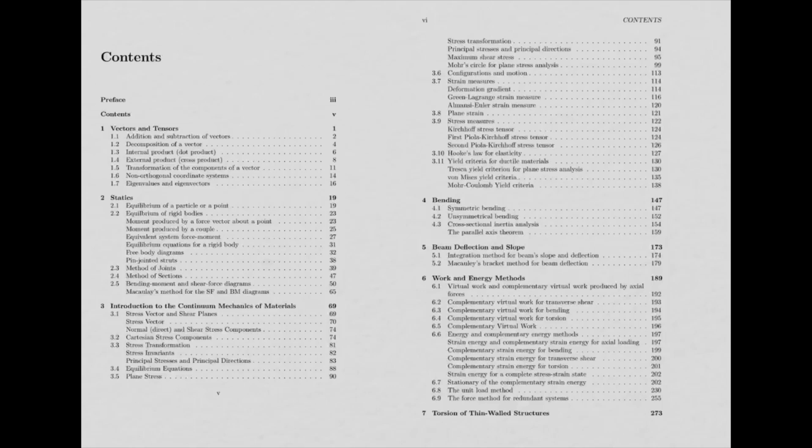All right. Now, next I want to show you the table of contents and give you some overview of the main chapters on this book. So the first chapters are introductory chapters, basic chapters where we have vectors and tensors, where the basics about the manipulation of vectors and tensors and eigenvalues, eigenvectors are introduced. Then you have a second chapter on statics, which is also very basic concepts, equilibrium equations.

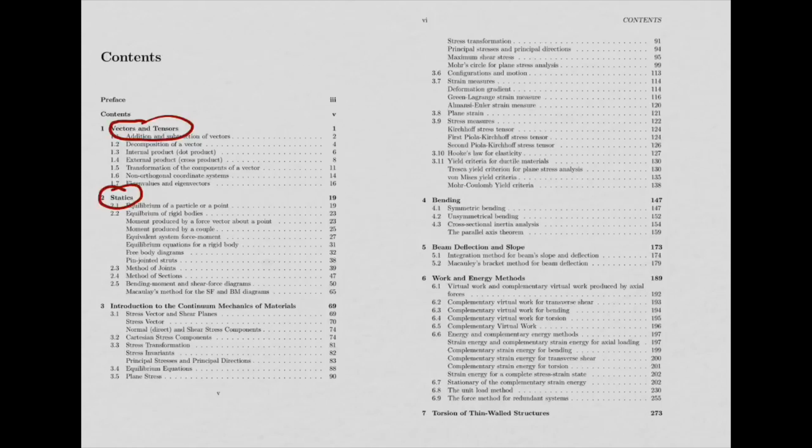Then you have an important chapter on basically stress analysis, where it is shown the definition of stresses, stress transformations, principal stresses, principal strains as well, equilibrium equations for stresses, plane stress analysis, where it also introduces the Mohr circle, a very important concept. And then I go a little bit further, talking on some strain measures, some stress measures, talking about Hooke's law for elasticity, and also a very important thing is yielding, so I give some introduction of some yielding criteria.

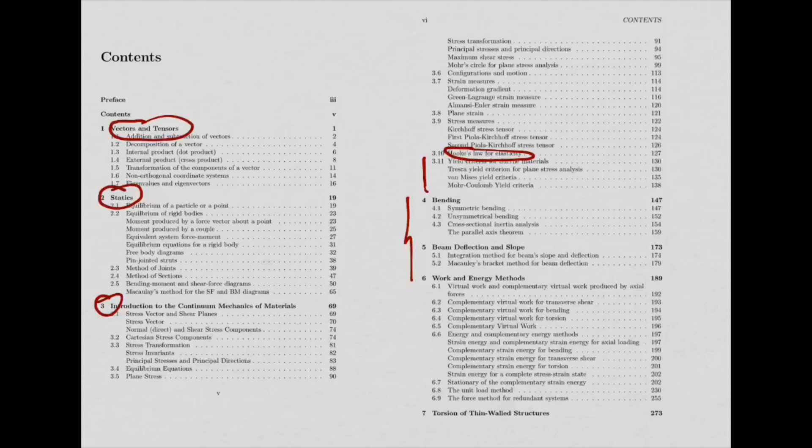Right, following these basic chapters comes the bending and beam deflection, which is going to be very important for the formation of thin-walled structures. And then there is a big chapter on energy methods, so I try to detail this chapter with many examples. Not only this chapter, but all chapters have many examples with solutions included. But energy methods are very important also for the chapter on numerical methods and for the derivation of some finite elements. So I think it is very important to have this chapter very well detailed.

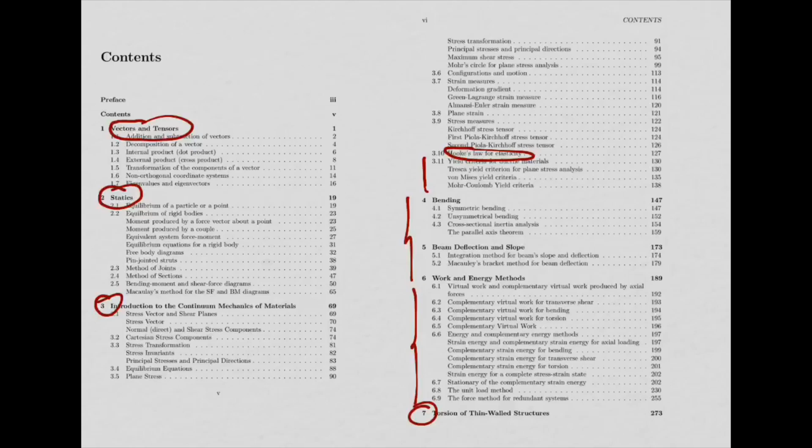Then chapter 7 for torsion, where basically torsion is introduced for thin-walled structures and multicellular cross sections. And you also have a chapter on the transverse shear for thin-walled cross sections. After this chapter 8 comes an important chapter on aircraft structures, where basically some techniques for structural idealization are introduced. And this chapter is dedicated to the analysis of aircraft structures, because they need to be very lightweight structures, right?

So basically, in this chapter, the construction of idealized structures is presented. How can we simplify a real structure into a simplified model? And then do the analysis for the transverse shear flows, and also this section 9.3, energy methods and deflections, where basically we take the concepts from the work and energy methods from the previous chapter and apply this for the prediction of the deflections and twisting of an aircraft structure, like a wing, for example.

So one important thing is that in this section 9.3 I provide a MATLAB code basically for the automatic calculation of deflections and shear flows or shear stresses and bending stresses as well in aircraft structures, for example, for a wing, right? So I'm going to show you one example where you can see what this MATLAB code that is included in the book can do. All right.

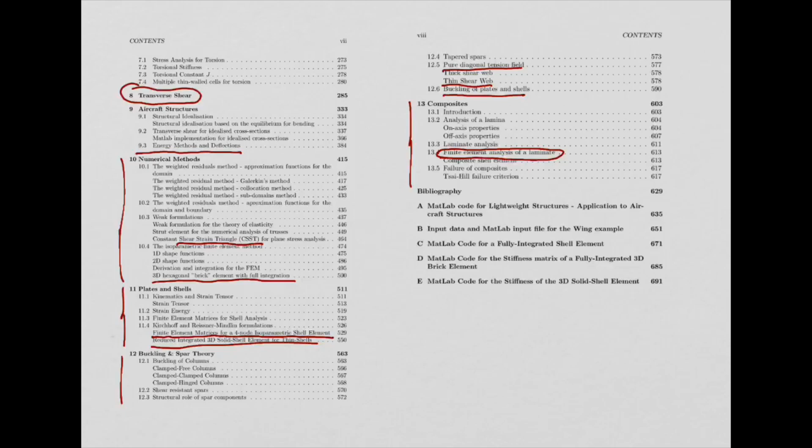But the good thing is that I included also here the MATLAB code to model composite materials with the shell elements developed in previous chapters. So I think it is interesting. So that's the main idea of this book: not just to present these important concepts for the modeling of lightweight structures, but also to give the MATLAB codes for many different structural elements, structural methods like the buckling, modeling composite materials, and modeling of idealized structures. That's the main idea of this book. It's the main contribution, I think.

You can see that in the appendix there are many appendixes with the full code for these different elements I just told you, all in MATLAB. Okay, I can give you now some very few images of some examples simulated with these MATLAB codes included in the book. For example, this example you see here and here was simulated with MATLAB code from chapter 9, aircraft structures, especially these energy methods and deflections.

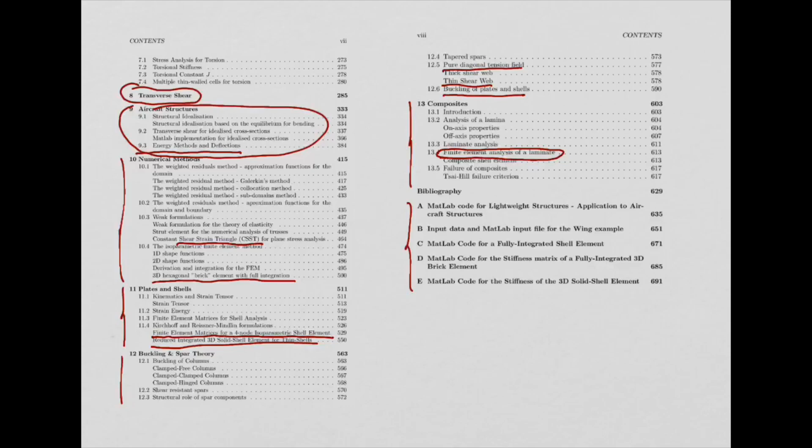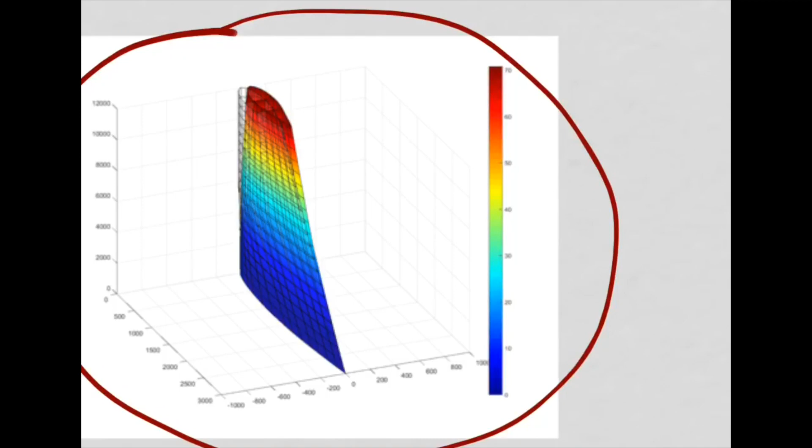So with this MATLAB code you can predict the shear flows, you can predict the deflections, as you can see here. Maybe I can zoom in. You can see the original configuration of the wing and then the deformed configuration on this side, right? All predicted by using structural idealization.

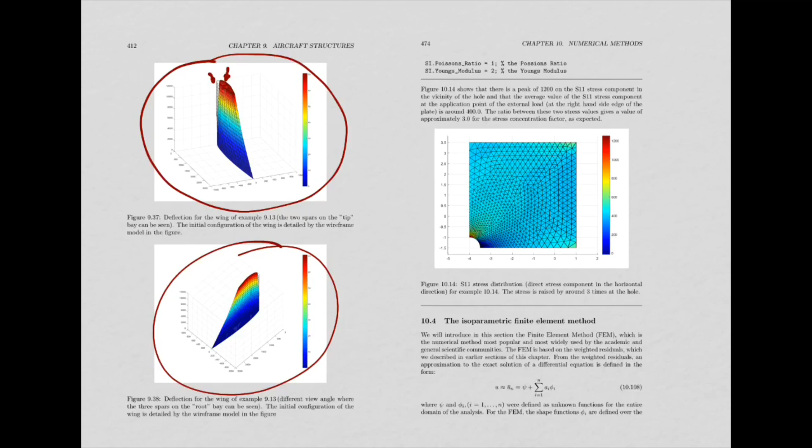For example, the constant strain triangle. One example I'm showing here now is the modeling of a plate with a hole. So I'm showing only 1/4 of the plate. So you know that in the vicinity of the hole, the stress needs to be 3 times the stress applied on this region. So you can model these kind of problems with this constant strain triangle included in the book.

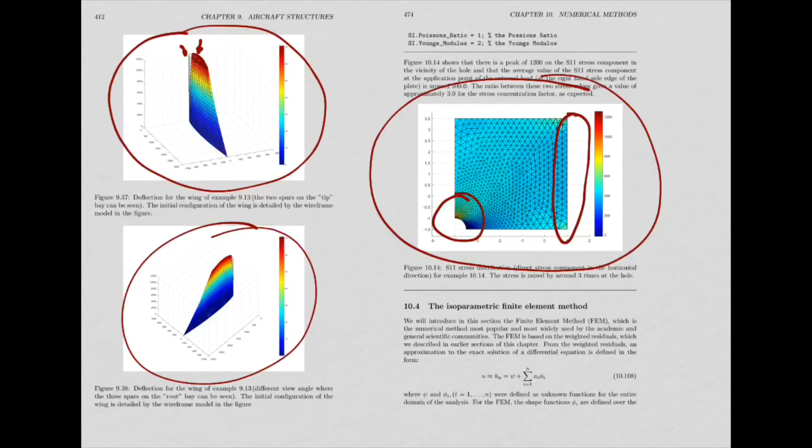For example, for the 3D hexahedral element, you can simulate this kind of things. For example, this is a hinge where you have two deformable bodies here, and you have a pin which is considered to be rigid. So basically, for this simulation, the MATLAB code for the stiffness matrix of this 3D element is included, and you can do this type of analysis.

Another example is shell analysis. With the 4-node shell element included in the book, you can simulate this kind of thing. So what you see here is 1/8 of a sphere, where you have two loads, one applied in this direction at this point and the other applied in this direction. So this is a typical benchmark for shell analysis. So this is something you can simulate with the shell element included in the code.

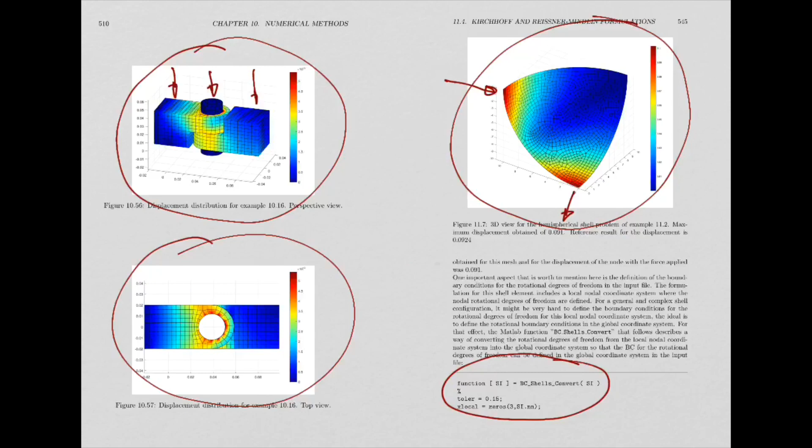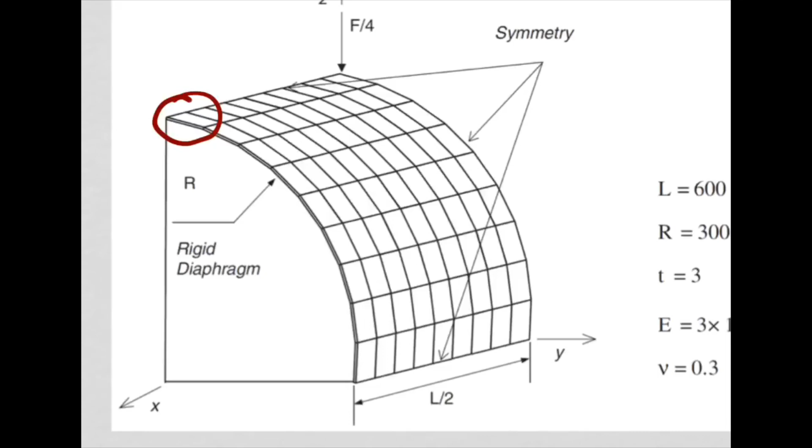As you can see, I'm not showing all of it, but you can see the MATLAB routines. They are included in the book in this form, so you can have an idea of the MATLAB code you can expect. Another example is a 3D solid shell element. You can see the thickness here, right? This is a 3D solid shell element, and you can do this kind of simulations. So a pinched cylinder. This is the scaled deformed configuration you obtain from the MATLAB code included in the book as well.

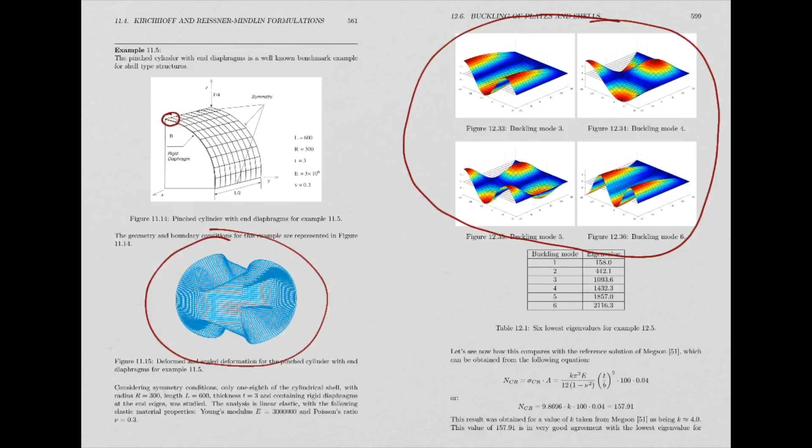The last example I want to show you is for the buckling. As I said, there is a chapter on the buckling of plates and shells and the spars, diagonal tension fields, and this is the kind of results you can obtain from the MATLAB code included in the book. You have here 1/4 of the plate, which is under compression. I think it is fixed in this boundary and also fixed in this boundary. And then here and there you have symmetry boundary conditions, right?

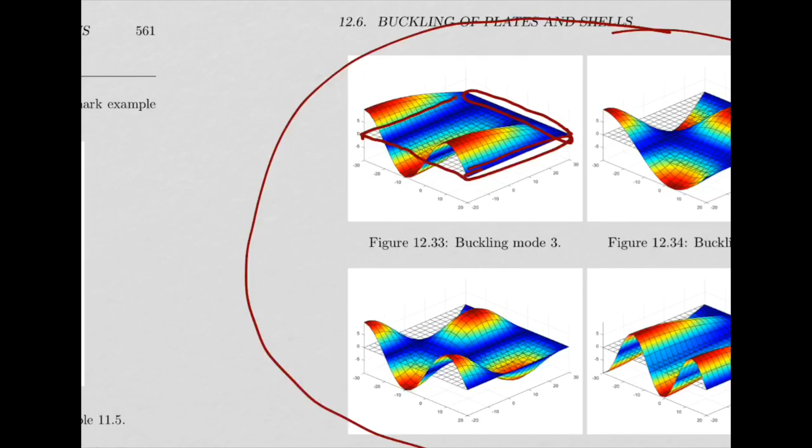And what you see here are the buckling modes. Well, not the first. This is mode 3, mode 4, mode 5, and mode 6. But the result obtained from the MATLAB code for the critical load is 158, and if you compare with the reference result, which gives 157.91, you can see the prediction of the buckling critical load is quite accurate. So this is also the kind of problems you can analyze, the buckling of plates and shells, from the code included in the book.

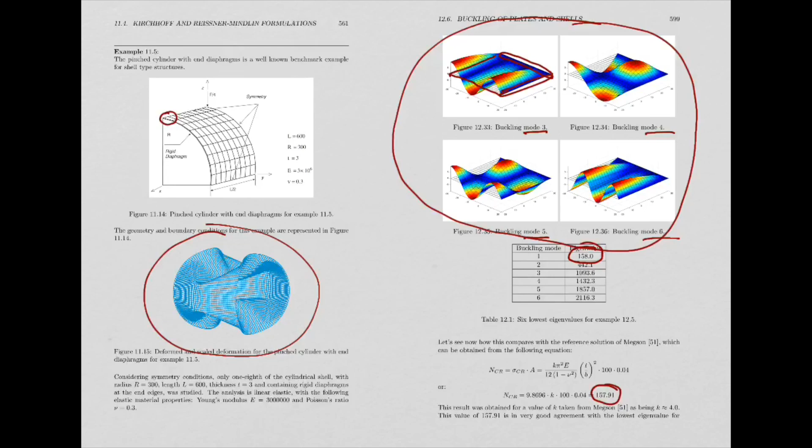So that's it, basically. Just going back to the first page. So this is the book I just got published. I'm really very happy to have this book out, because it's a work I've been doing for at least 6 years, compiling many examples with solutions and with MATLAB codes I have from my research activities. And so I decided to put everything in the form of this book, which you can find on any Amazon website, and I think you will really like it.